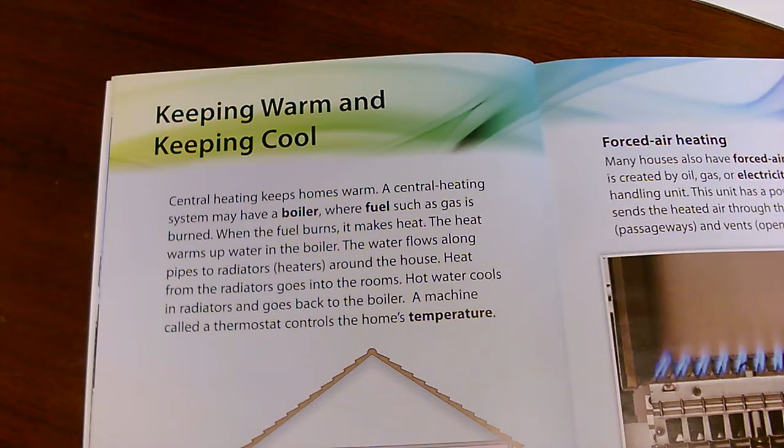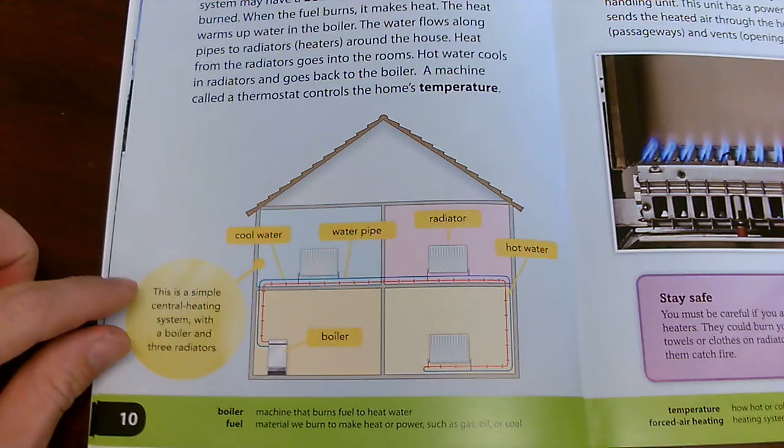It's going to describe some of the ways that homes can get heat. There is a diagram right here at the bottom. Once again, it's a diagram because it has a picture and each part is labeled. It says this is a simple central heating system with a boiler and 3 radiators.

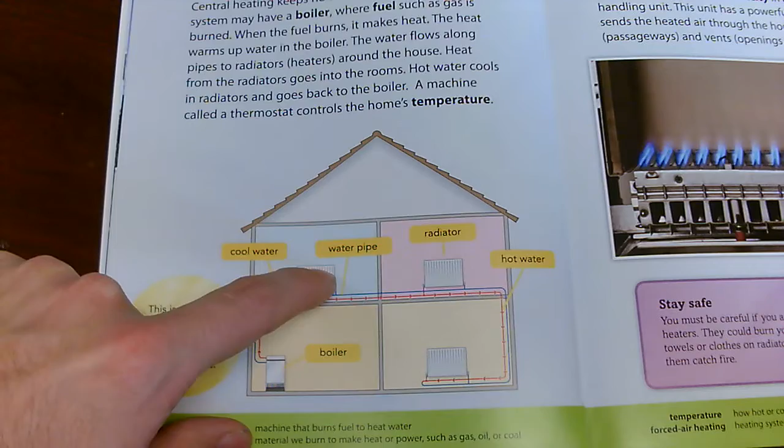So it looks like the boiler's at the bottom of the house or the basement. There's this blue line that brings cool water to a water pipe, a radiator. Looks like the hot water you can see is red, and it brings it to where it needs to go. Let's go ahead and read the section to learn more.

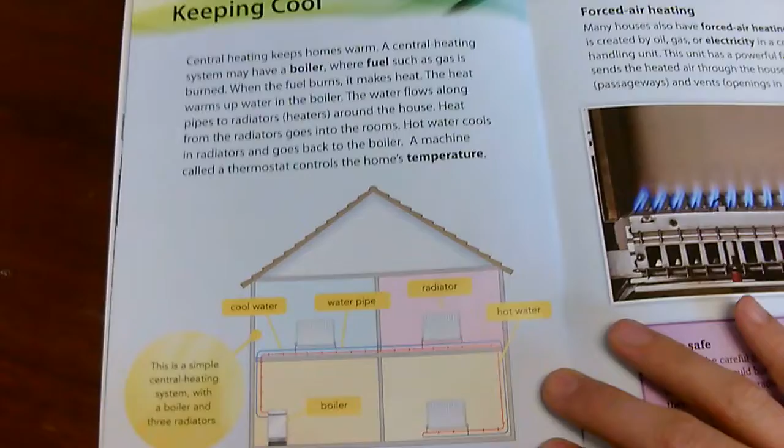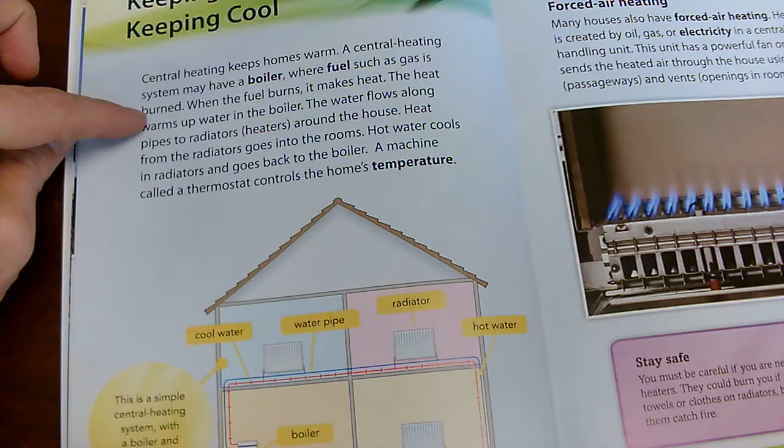Central heating keeps homes warm. A central heating system may have a boiler where fuel, such as gas, is burned. So again, boiler and fuel are bolded.

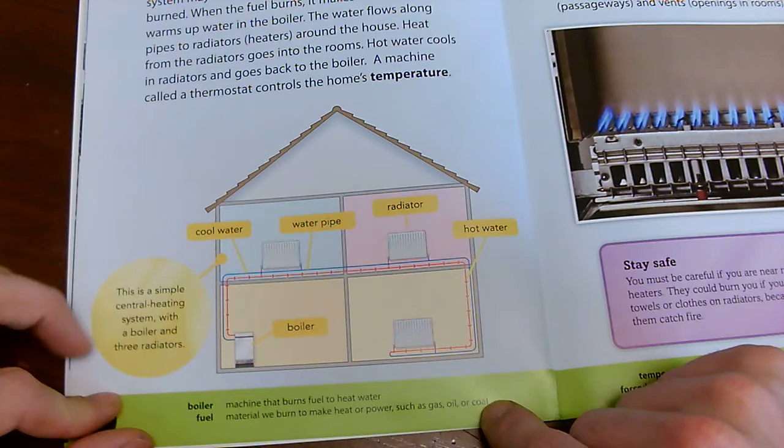A boiler is a machine that burns fuel to heat water. Fuel is a material we burn to make heat or power, like gas, oil, or coal. So the boiler is going to heat our water.

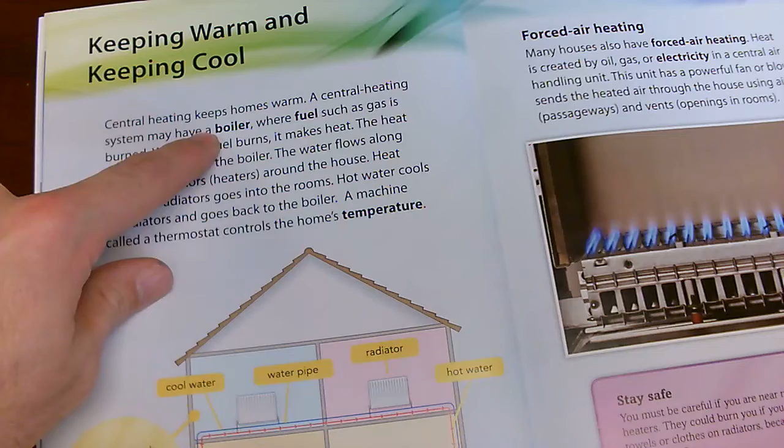A central heating system may have a boiler where fuel such as gas is burned. When the fuel burns, it makes heat. The heat warms up water in the boiler.

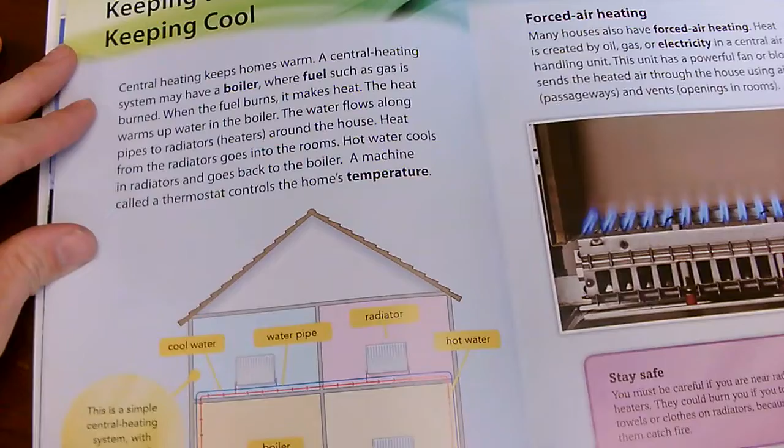The water flows along the pipes to the heaters around the house. Heat from the radiators goes into the rooms. Hot water cools in radiators and goes back to the boiler.

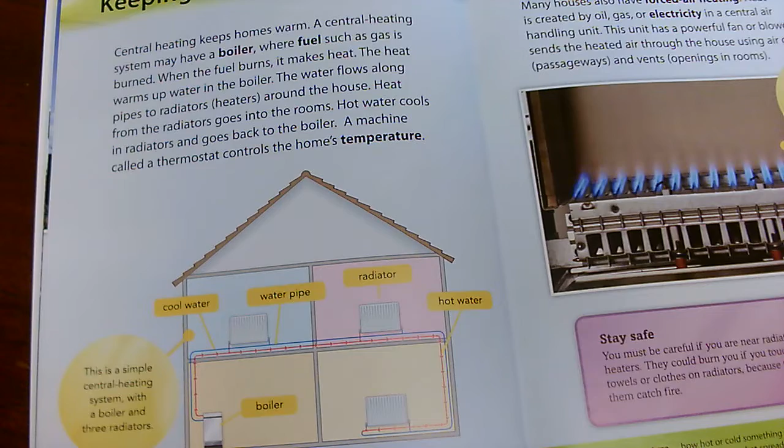A machine called a thermostat controls the home's temperature. So if you want your temperature warmer, your boiler is going to do more work.

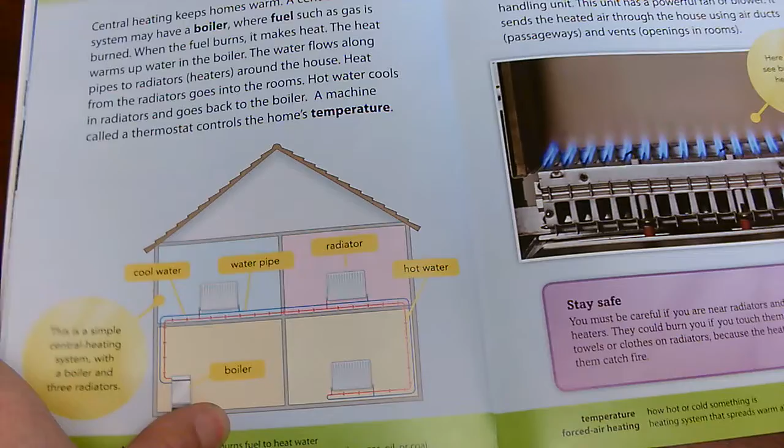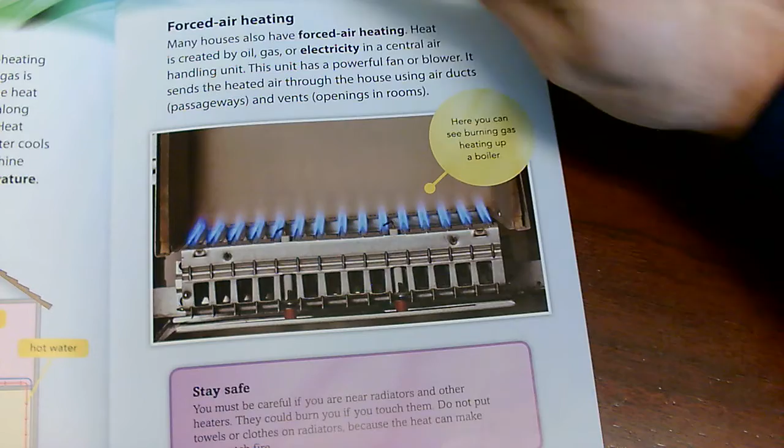This next page, page 11, tells us all about how some homes keep heat in. Forced air heating: many houses also have forced air heating, meaning forced air, a heating system that spreads warm air through ducts and vents.

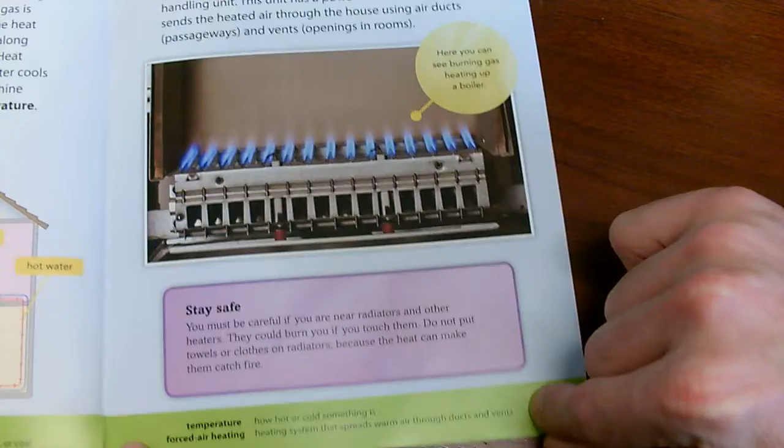Heat is created by oil, gas, or electricity in a central air handling unit. This unit has a powerful fan or blower. It sends the heat through the house using air ducts, like passageways, and vents, openings in your room. You'll see vents in every room you're in so that you can get that heated air.

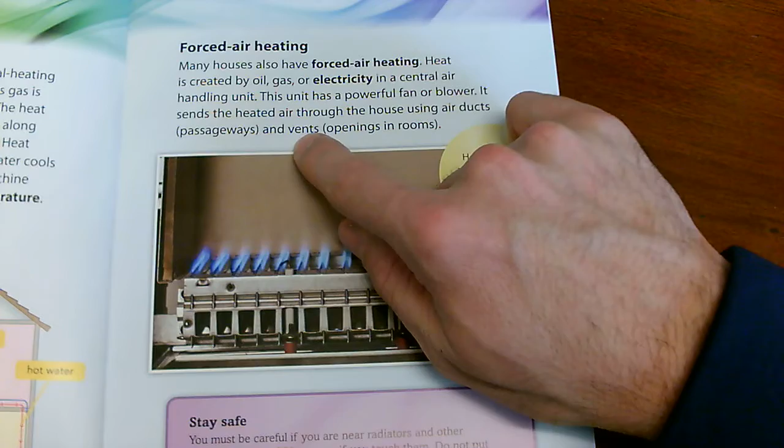Here you can see burning gas heating up a boiler. If you have a heater in your own house, you will see the gas burning somewhere in it. Make sure you ask a parent before you go see it if you want to.

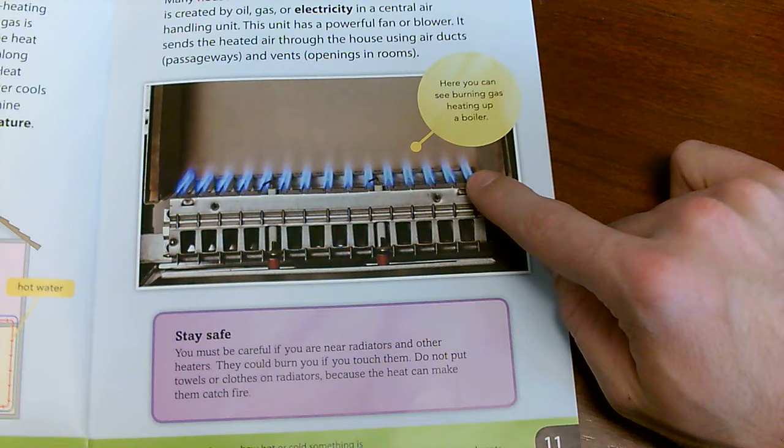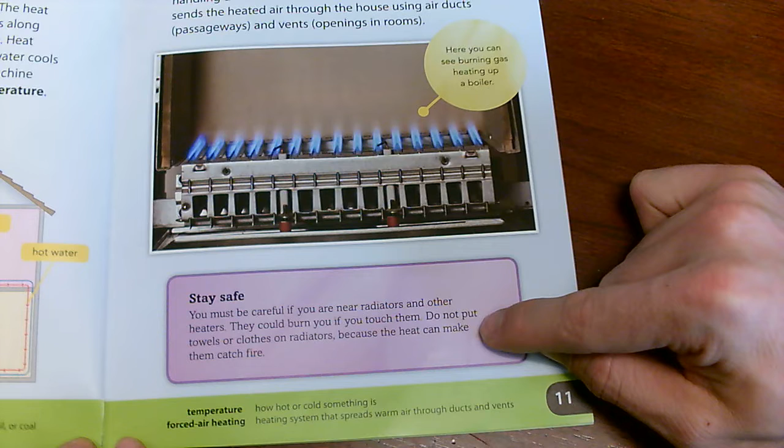Stay safe. You must be careful if you are near radiators and other heaters. It could burn you if you touch them. Do not put towels or clothes on radiators because the heat can make them catch fire.

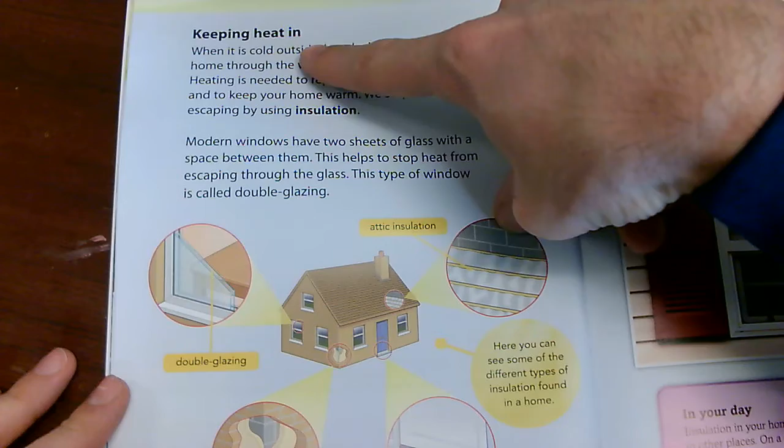The next page we're going to read about is how people are going to keep the heat in your house. You heat your water, you heat your air, you want the heat to stay in. Once again, we have a diagram I'm going to look at before I start reading.

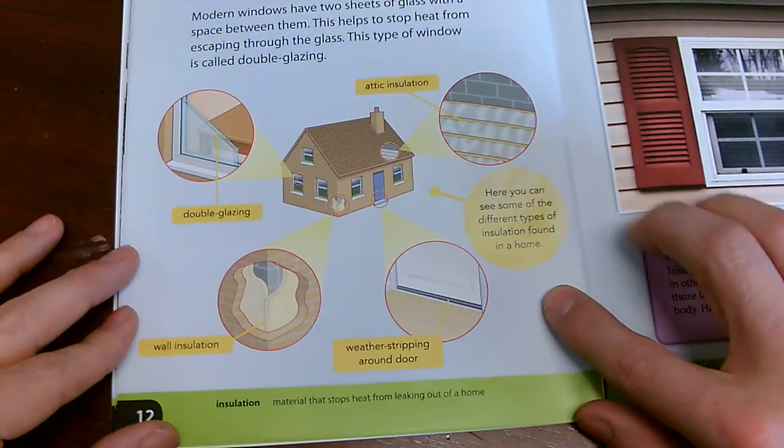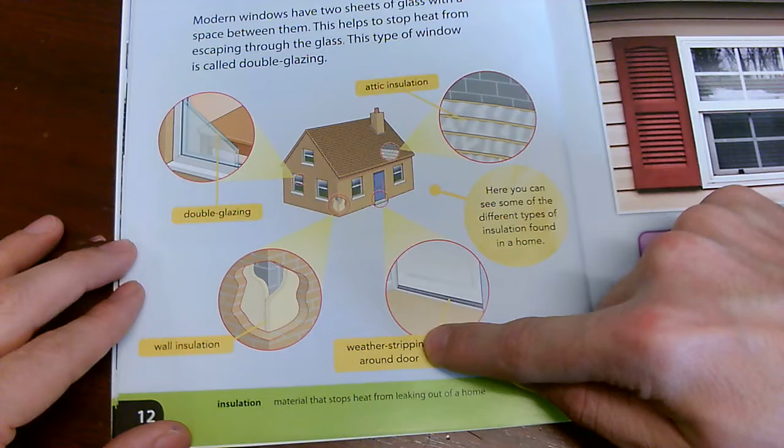Here's a picture of a house. It says that my attic has insulation. It says that my door has weather stripping. It says that my wall has insulation. And my windows have double glazing.

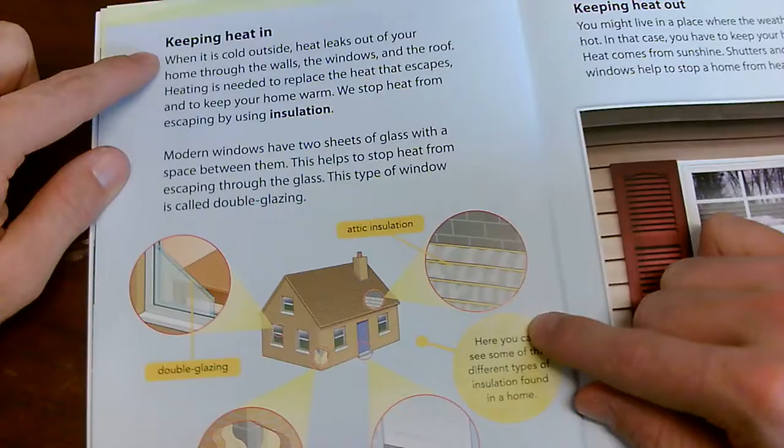When it is cold outside, heat leaks out of your home through the walls, the window, and the roof. Heating is needed to replace the heat that escapes and to keep your home warm. We stop heat from escaping by using insulation.

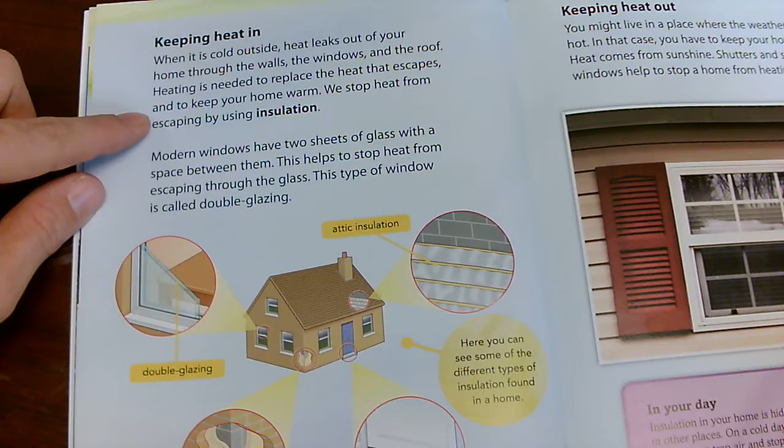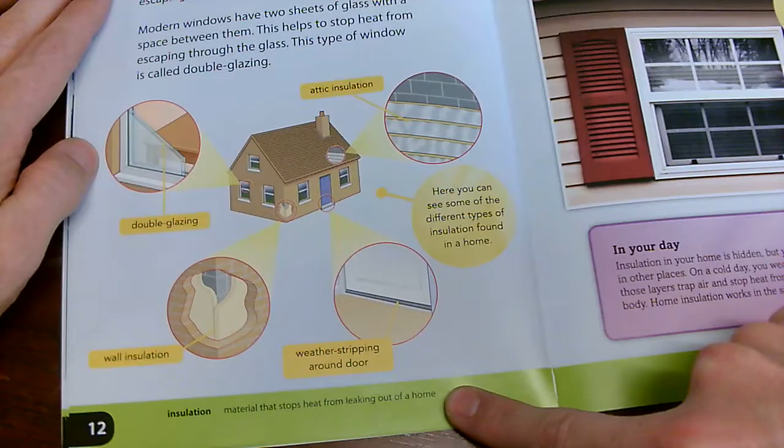Once again, insulation is bolded. Insulation is a material that stops heat from leaking out of your home. Insulation's everywhere in your home, in between the walls, in the cracks in your home. It's not perfect, but it does a good job.

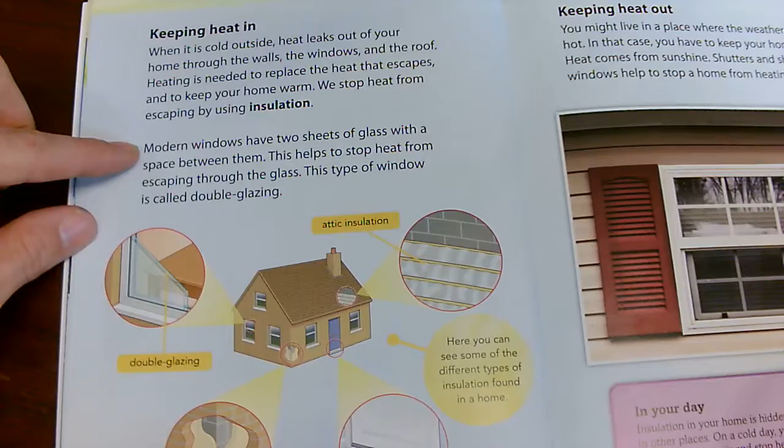Modern windows, meaning new windows, have 2 sheets of glass with space between them. This helps to stop heat from escaping through the glass. This type of window is called double glazing.

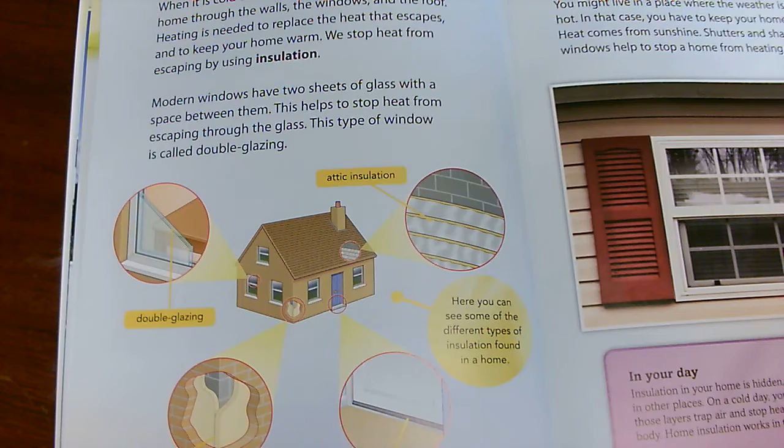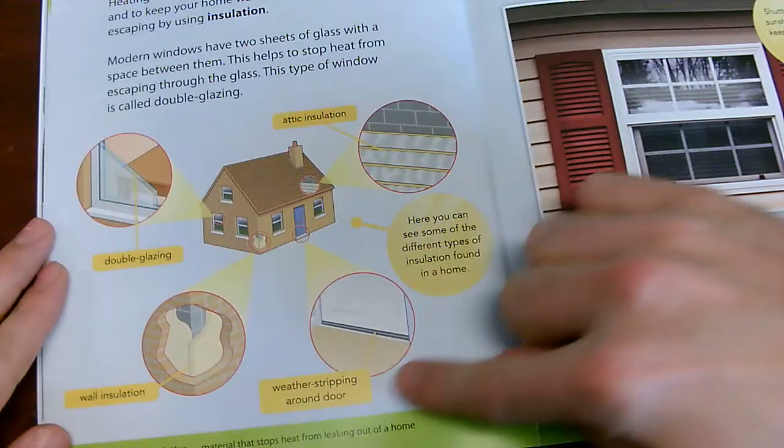Alright, today we read and we used headings to know what the page is about. We found new or interesting words that were bolded, and we used a diagram to help the information make sense so I could see a picture and a label so I know what I was talking about.